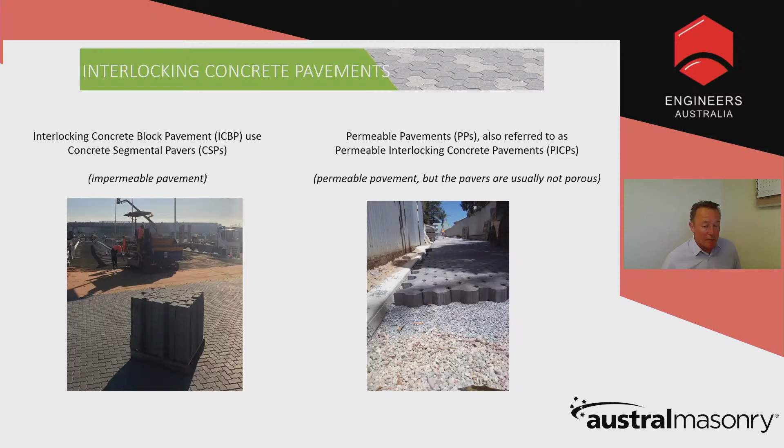CMAA, with great foresight, saw this as an impediment to the adoption of this innovative technology, and so they commissioned UniSA to develop what is the world's latest and most sophisticated software program, DesignPave. The Concrete and Masonry Association of Australia, or CMAA, is the peak industry body representing Australia's concrete masonry manufacturers.

The CMAA funded UniSA to develop the new DesignPave software, which was authored by my colleague, Associate Professor Mizanur Rahman. Later in this webinar, Mizanur will demonstrate the software, which can be downloaded free of charge from cmaa.com.au.

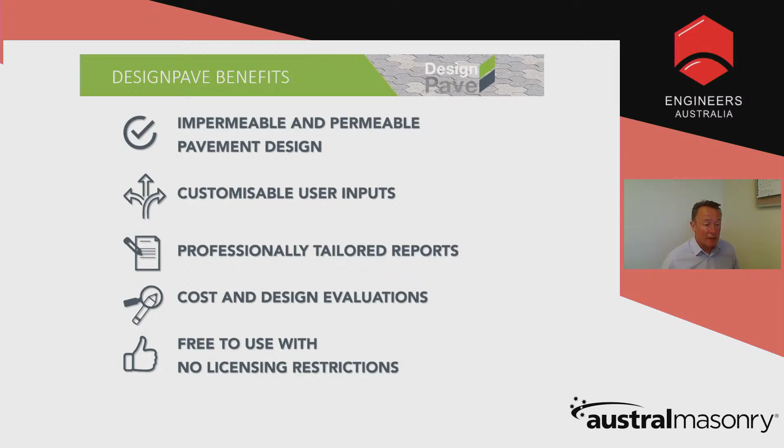The DesignPave program designs both impermeable and permeable pavements and has customizable user inputs. It produces engineering reports for consenting authorities. It can conduct a cost and design evaluation, and as I mentioned, it's free to use.

In terms of engagements, either with the program or with the supporting workshops, in the council arena, we've engaged with 17 councils and over 150 separate participants. And in terms of engineering consultancies, 31 consulting firms and over 300 participants.

I'd like to now focus on 3 recent projects, 2 in Sydney and 1 in Adelaide, that were using the new software tool DesignPave. The first is the very recent 3,000 square metre upgrade of interlocking pavers. You remember these are the impermeable ones, along one of Adelaide's busiest and trendiest streets, King William Road.

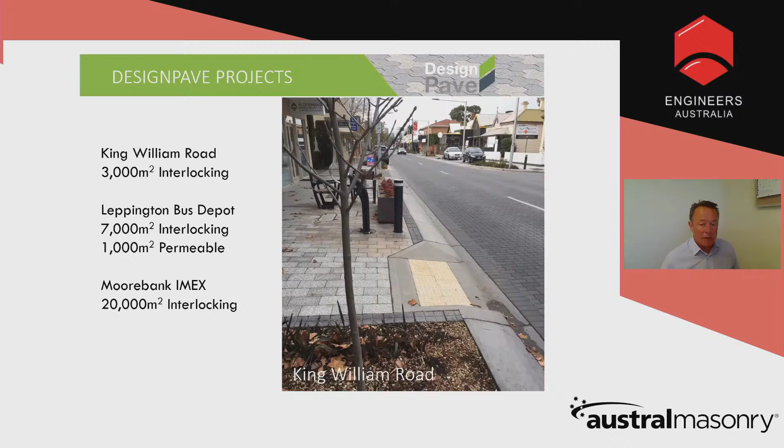King William Road was first constructed with ICBP in 1985. The paved road was 2.2 kilometres long and was and still is the longest and oldest length of urban arterial road in Australia to utilise concrete segmental paving.

Last year, it was reconstructed as shown in the colour photograph. Note that the original interlocking concrete block pavement lasted for 35 years, even though its original design life was probably 25 years. This is the reconstructed pavement today.

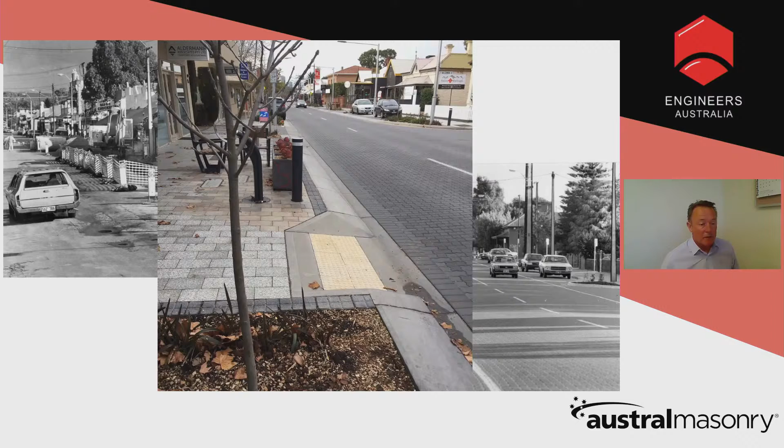The second project is the Leppington Bus Depot. Leppington is one of the first suburbs to be part of the southwest growth area of Sydney, and this project represents part of the public transportation services upgrade.

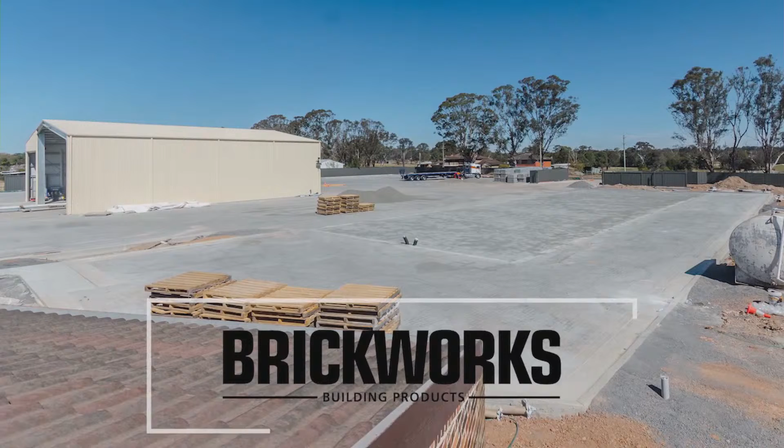The project consisted of 2,000 metres squared of building facilities, 7,000 metres squared of impermeable concrete segmental paving, and two 500 metre square permeable concrete segmental paving pits. All the runoff from the 10,000 metre square site was diverted into the two permeable pavement pits.

Permeable pavements were used to allow designers to maximise the total hardstand area for the bus company. By using permeable pavements, designers were able to reduce site discharge below the council threshold of 88 litres per second for a 5-year design storm and 165 litres per second for a 100-year design storm.

Additionally, the permeable pavement base acted as an underground detention basin, achieving the on-site storage capacity requirement of 200 kilolitres, as specified by the council. This was achieved without constructing large above-ground water storage infrastructure.

From an environmental viewpoint, the project also used a variety of recycled materials. For instance, the base of the interlocking hardstand used blast furnace slag, a waste byproduct from the manufacturing of steel. Recycled sand was used as the bedding sand layer for the interlocking pavers, and the pavers themselves were manufactured with a cementitious replacement in the form of fly ash, a byproduct from the combustion of coal at power stations.

This project also demonstrates the advances that have occurred in mechanical laying of pavers. New pavements are typically laid at 600 to 1,000 square metres per day. Relaying rates are typically 200 to 250 square metres per day.

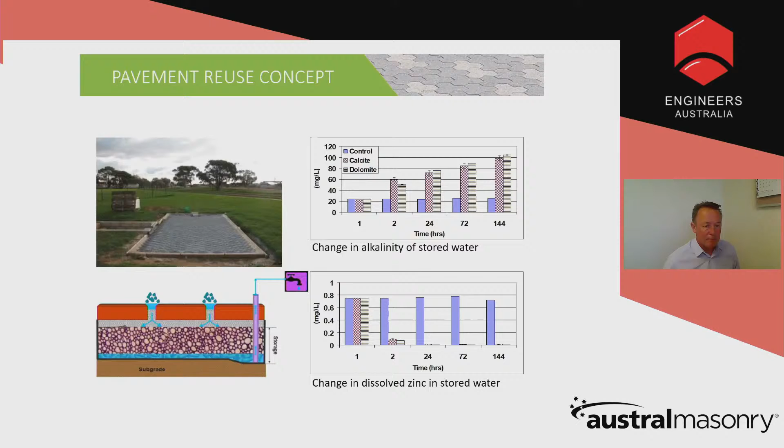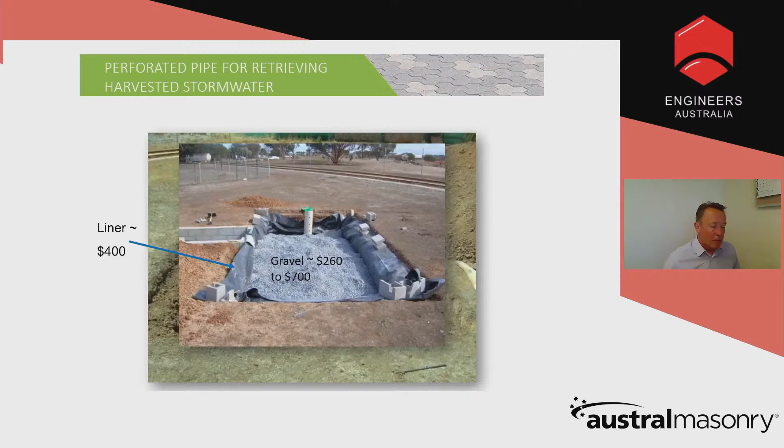The high density polyethylene liner comes welded to the shape of the hole, and that costs $400 to deliver to site. The pavers cost $500 and the bedding gravel cost a further $200, and the total material cost for that car space and 4 kilolitre rainwater tank was $2,200 per car space.

Very affordable. This has shown the simple costs of a small residential system, but what about the cost benefits of other larger systems? The most comprehensive study of whole-of-life costs was undertaken in 2006 in the UK and involved 250 separate projects that were all redesigned and reanalyzed for both asphalt and paving systems.

The results show a whole-of-life analysis that pretty much summarizes that permeable or interlocking concrete block pavements are, in terms of whole-of-life, better than asphalt pavements, other than in initial costs.

It's usually the initial costs which dictate which way a design will go, which is unfortunate because when you look at normal discount rates between 5 and 10%, asphalt in 250 projects was less beneficial environmentally and economically than concrete block pavements. You had to raise the discount rate to over 15% before asphalt becomes more competitive. So that's a whole-of-life cost analysis.

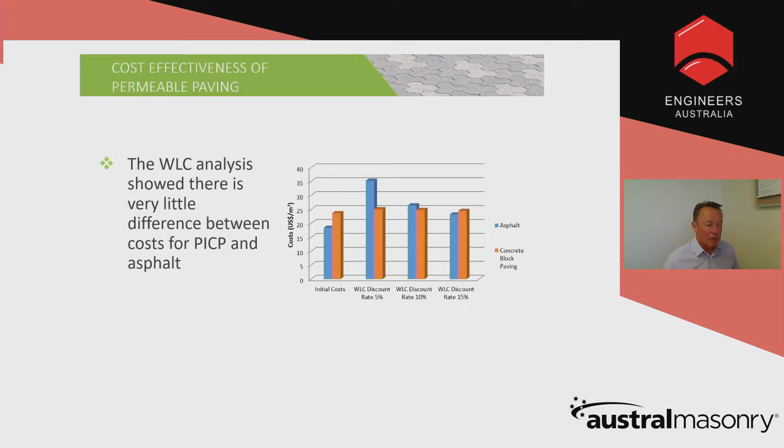What about the environmental performance? Well, one of the benefits of both permeable and interlocking concrete block pavements is their performance in terms of heat island mitigation or amelioration. Asphalt has a very low albedo, predominantly because of its black color, and so it absorbs more heat and radiates this back both during the daytime and the nighttime.

In a Japanese study during the Japanese summer, a paving system reached a maximum temperature of 40 degrees C during the day, while a comparable asphalt system situated adjacently reached a further 18 degrees higher, 58 degrees centigrade. That gives you an indication of what happens with these systems.

When you compare the performance of PICP, which is permeable interlocking concrete pavement, with asphalt and with porous asphalt, there was a stark contrast. During the day, which is the left-hand bar in each case, there was a threefold increase in the daytime sensible heat flux for asphalt and porous asphalt. And this was mirrored at night.

While both were lower, the asphalt and the porous asphalt still radiated 3 times the heat that a concrete block pavement radiated out. So this is further evidence that the environmental performance of permeable and interlocking concrete block pavements is better than conventional asphalt.

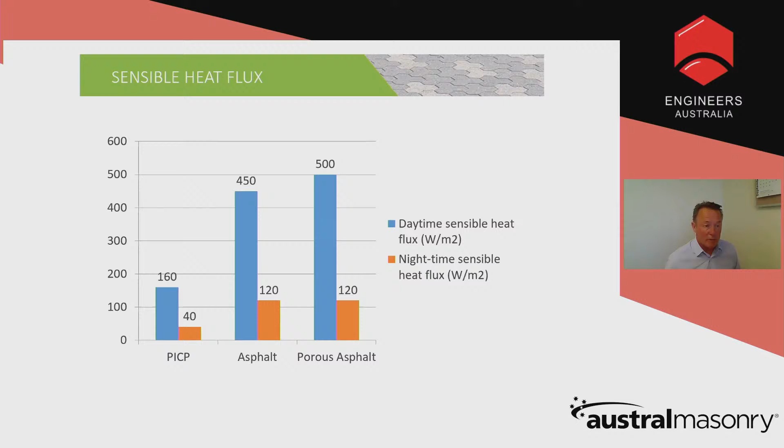A further answer might be to use carbon neutral paving with natural air conditioning through evapotranspiration. A typical tree may capture 20 kilograms of carbon dioxide per annum, or 1 ton over a 50-year lifespan. Therefore, 1 tree per 11 square meters would be required to offset a concrete segmental pavement or a permeable pavement to make it carbon neutral.

Most engineers, though, would cringe at the thought of integrating tree roots with paving systems, but this is largely unjustified for permeable pavement systems, as I'd like to show you.

These photographs are taken from Dr. Tim Johnston's field experiments conducted for his PhD at UniSA. They show juvenile ornamental pear trees planted adjacent to permeable pavement systems located in heavily reactive clay soils in Adelaide. His 4-year study traced and mapped the root architecture that developed in these trees as a result of watering from the permeable pavement.

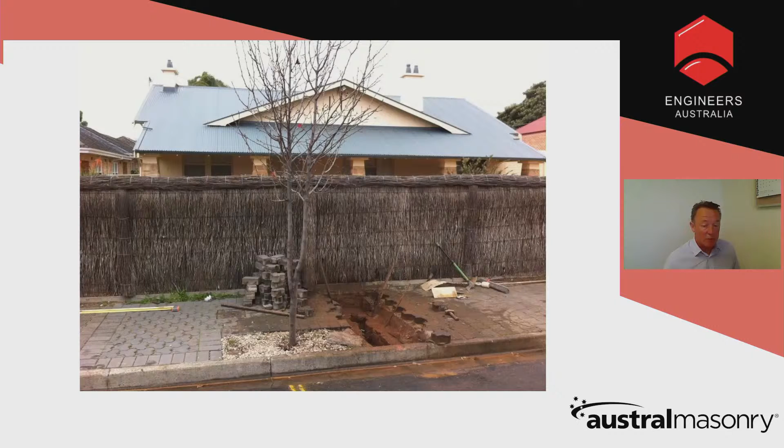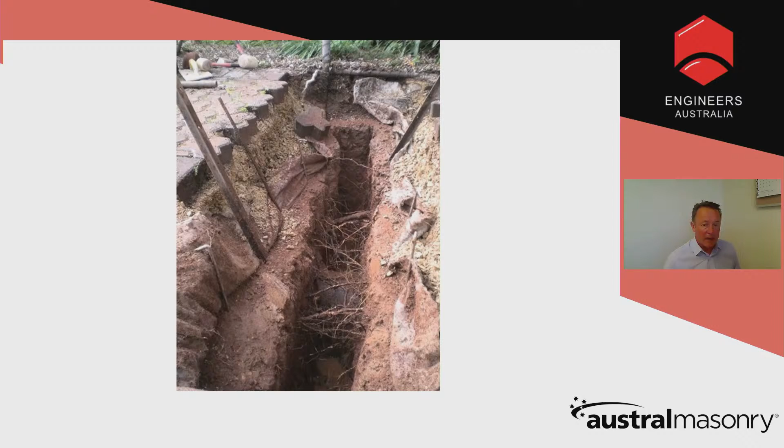Only opportunistic fibrous roots were found in the base course because this layer dries out so quickly, so those fibrous roots never grew into more substantial woody roots. More permanent woody roots were all confined to the underlying clay subgrade, where water was retained for much longer. That's how the architecture of the tree roots developed during that 4-year period. There's a further photograph showing these systems.

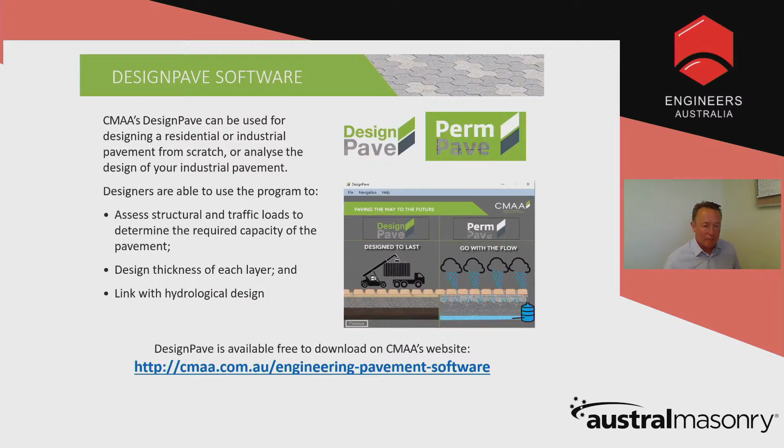I'm now going to hand over to my colleague, Associate Professor Mizanur Rahman, who will demonstrate the DesignPave software, which, as I mentioned earlier, can be downloaded free of charge from cmaa.com.au. Thank you.

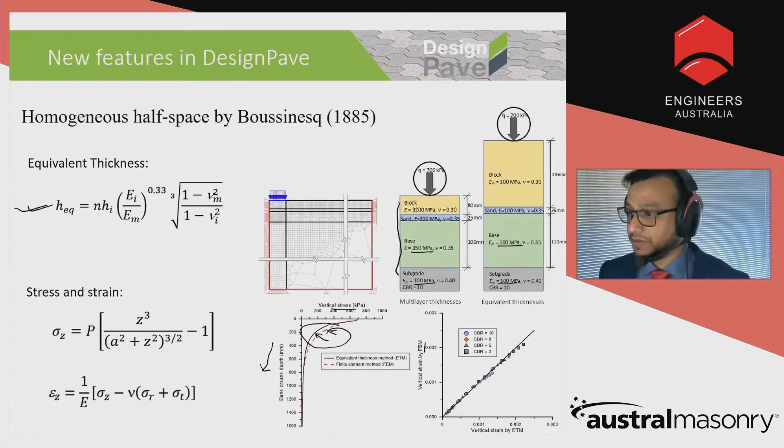Now, interlocking paver is slightly different than conventional pavement, so we need additional consideration for interlocking paver design. Shackel, using falling weight deflectometer data, identified this paver system develops full stiffness between 5,000 to 10,000 load repetitions. This also depends on loading spectrum.

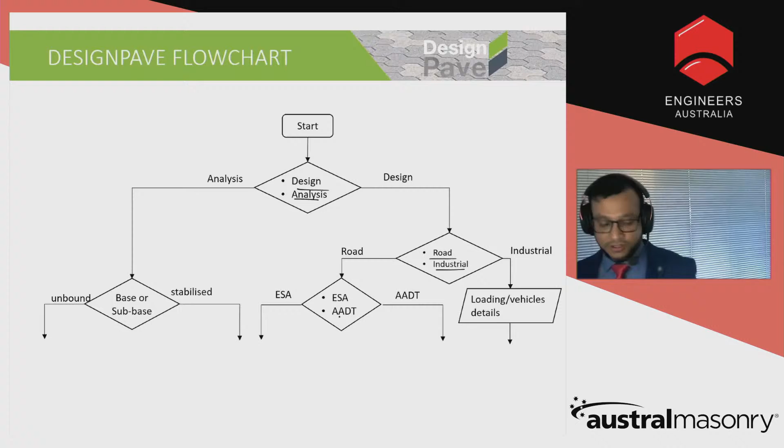Now I will show the flowchart of the DesignPave. When you start the DesignPave for interlocking design, you come up with two options: design or analysis. Analysis could be used for forensic investigation of a pavement failure. For design, when you get into the design option, you have two options: road design or industrial design. For road design, we could use equivalent single axle load or annual average daily traffic. Industrial load also depends on the vehicle type as well.

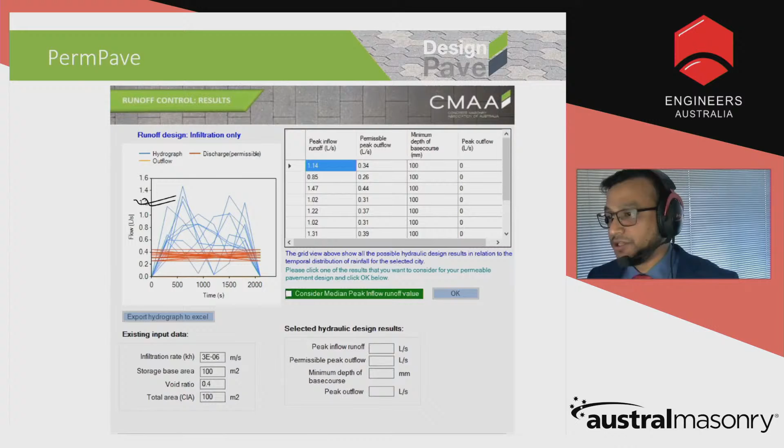ARR 2016 actually considers possibly 10 different rainfall areas. So when the software uses these options, it comes up with all possible combinations. I'll explain this a little bit later again. This is the reporting option. Detailed reports can be produced by DesignPave.

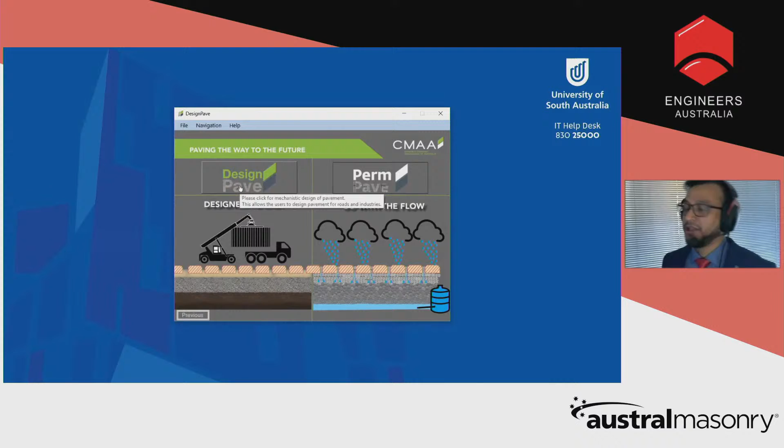So first I'll show this part. Let's get into DesignPave. As I said, you have options for design or analysis. I'll show you the design today. When you get into design, you can go to design for roads or industrial pavement. So let's get into the road.

We can design for equivalent standard axle load or annual average daily traffic. So let's get into annual average daily traffic. When you get that, you would be estimating what would be AADT. With this input parameter, you can calculate that. Let's go on. It's predefined, but you can change all these details.

Now, when you come up over here, you need to estimate what would be the soaked subgrade CBR. It could be 4, or if you have a linear structure, you could have a series of CBR values. So you could put those in and calculate the best possible case. The design goes with traffic spectrum. Let's check this traffic spectrum. So calculate over here and go ahead.

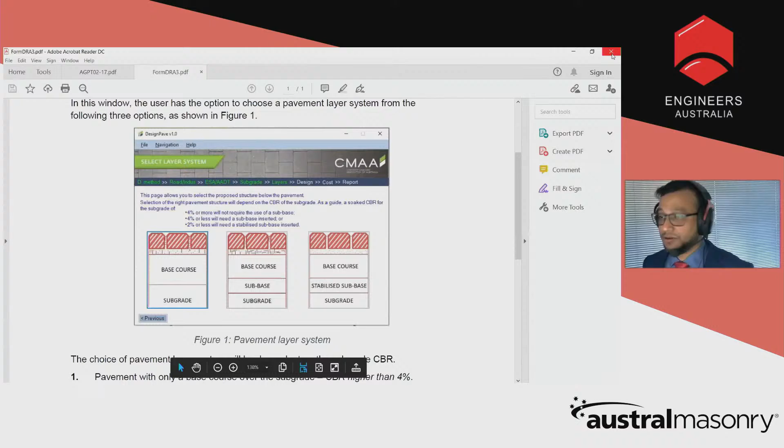We have 3 different options for design, so you could choose any of these. Now, while I'm going through these, note that we have detailed documentation to guide you with the software. For example, if I go to this page, what is it doing? It actually generates the PDF. It tells you what you have to do over here, and it also explains the theories in relevant sections.

So let's go with this one. This is based on traffic spectrum. This is the traffic data.

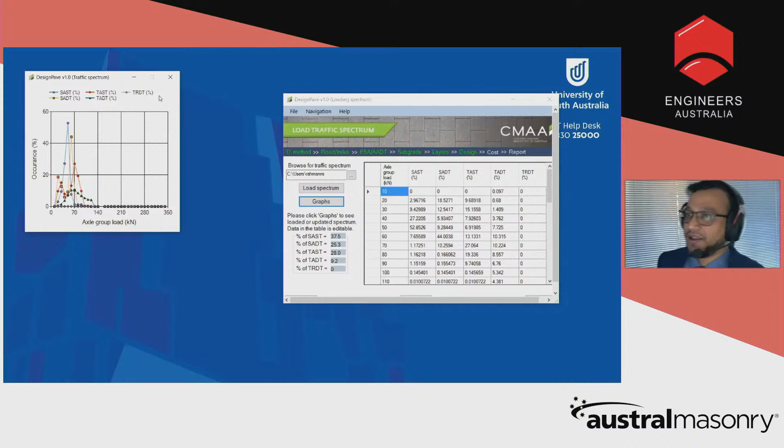I can change to any spectrum if I want to. For example, if I go over here and choose this one, load the spectrum, it's the same spectrum. Show the graph, and the graph generates in another window. So this is the spectrum load I have, and based on that, we'll be designing the pavement.

Now go next. If we design the pavement, click this button. Over here, you notice these are the pavement thicknesses that could vary from 60 to 120, depending on the ranges and material properties you choose. Whatever guide you get here is coming from CMAA. So design - this is the design thickness you got.

Now you notice this is not a smooth line, it's a step line for every 5 millimeter increment of thickness. It's a pretty lengthy calculation going on behind the software.

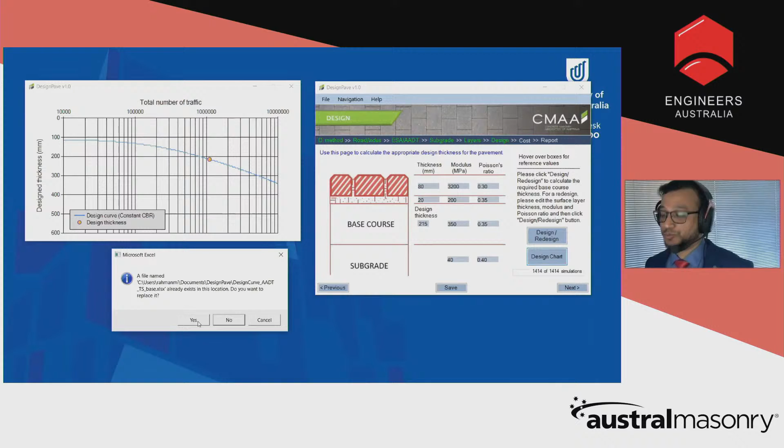So it generates all the data and tries to process it in an Excel file. It actually develops the data and saves it as an Excel file. I already have some data, so it's asking whether I want to replace the previous data. So we can add that.

When you go on with that, we can also do a calculation for cost. Let's go ahead, and then you have to save the file. Let's say save it as test1, and run.

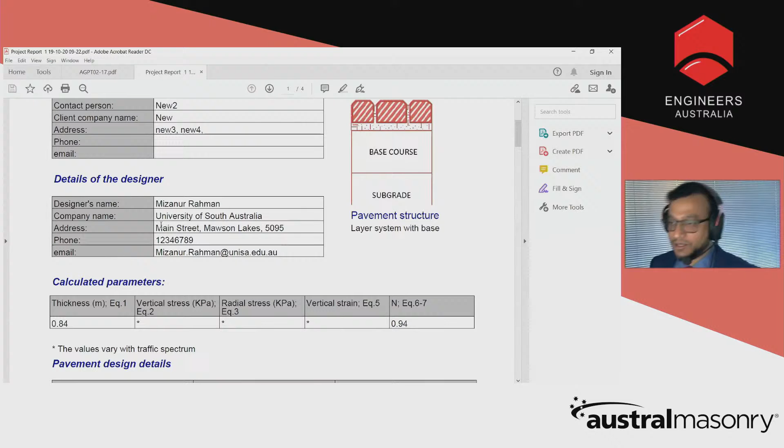This helps you to generate the report. If you click on it, it generates the PDF report. So you can see whatever details I put at the beginning - new, new 1, new 2, new 3 - all comes over here. My license details, all the calculation, all the data, and all the theories required for this design calculation.

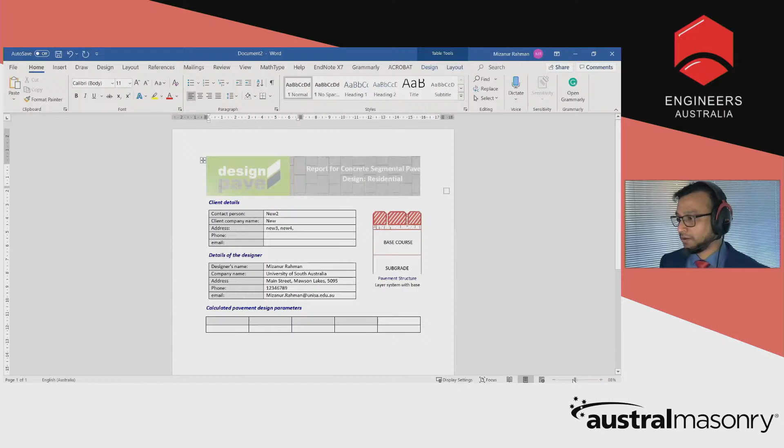Sometimes this is pretty standard, but people need to customize their report, so we also have an option for a Word report. Then you can modify the report as you need. So we'll keep it over here.

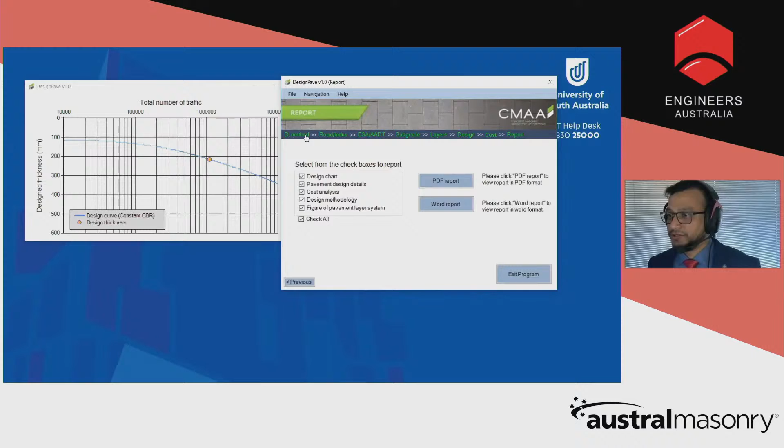So this is pretty much for the design of road. But if we want to design for industrial pavement, let me show you how to do that. Again, go to DesignPave, go over here. So we go design industrial.

Then we have options for several different types of industrial wheel load. We could actually tick all of these if we want to. If something is not here, then we could have a customized vehicle type. So go next.

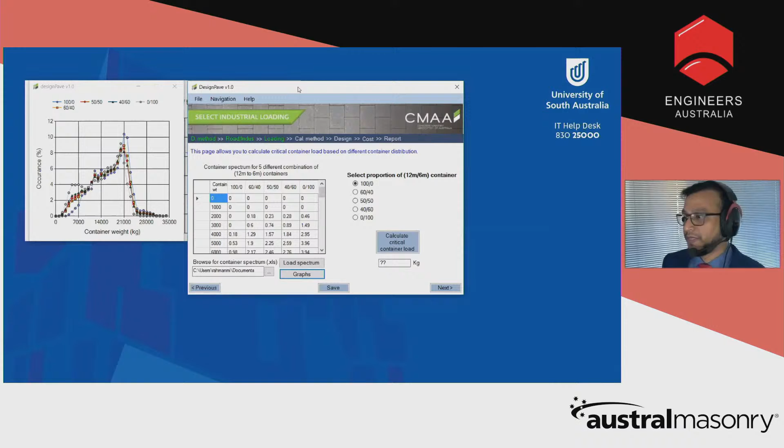Now sometimes for industrial loading, we could have container load. This is a spectrum for container load. We can change that - let me see what the container load is over here at the moment. So this is the spectrum we have. So calculate the critical load and go ahead.

Now, once you do that, whatever vehicle type we chose earlier comes over here. These are pretty standard, predefined configurations of the wheels. It could be changed, so you could modify that.

If you want to know what those are, you can go to the software and it will help you. For example, I often forget what this is - so D is this one, X is this one, for this type of wheel load.

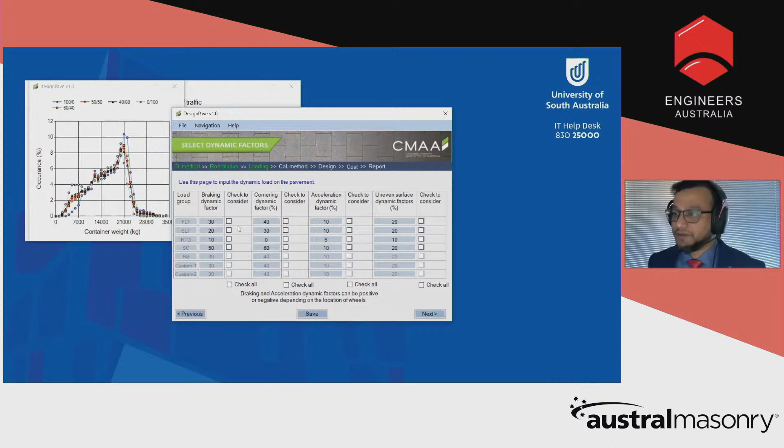Go next. For industrial loading, the dynamic factor is very significant, so you could have different kinds of dynamic factors. You can choose all of these, and you can modify all of these.

Go ahead. So once we do that, it calculates what would be the individual wheel load, and gives all these details over here.

Now, once you come over here, you could design the industrial pavement based on Miners rule, single equivalent wheel load, or British Port method, whatever you choose. So for example, I'll show you Miners rule.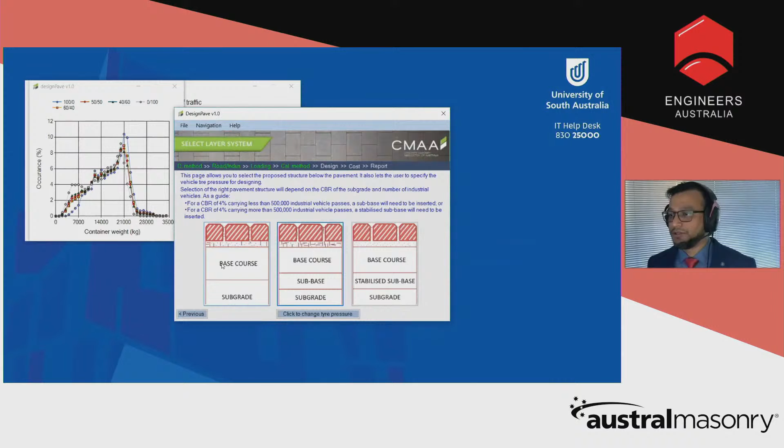So when you go to Miners rule, you could design this. Again, the design thickness comes like that. You can produce a design chart if you want to.

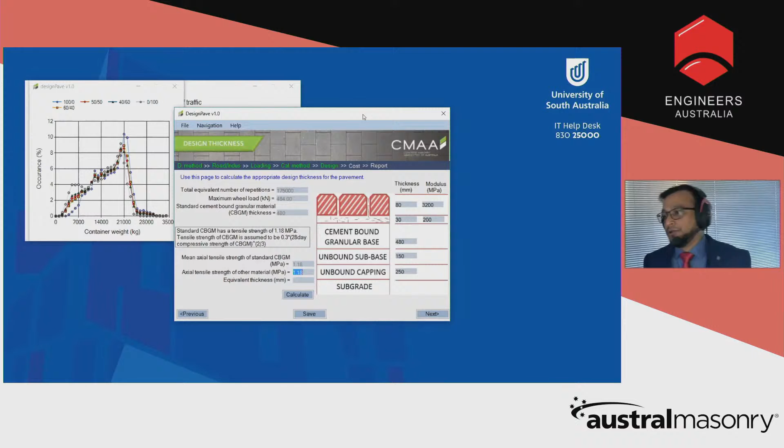Let's go back, and I want to show you a little bit about the British Port method. So British Port method is like that - so calculate. It actually uses a chart to calculate the design thickness with pretty specific standard material. So you can go ahead with that, calculate the cost, and you can also generate the report.

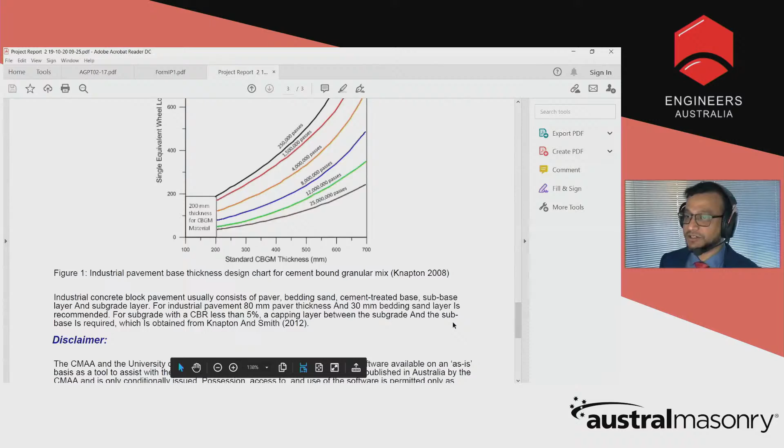So this is the chart used for single equivalent wheel loads that's also used in the British Port method.

Now I'll show you a little bit about permeable pavement design. When you do permeable pavement design, we design for 3 different options: runoff control, water quality, water harvesting. Runoff control and water harvesting are pretty similar, so I'll show you these two first and then water quality.

So let's go on with runoff control. When you get into runoff control, these are the options you could actually design permeable pavement road. Let's go with any option over here, residential pavement. If you do that, then it comes with paver options, so you can look at different types of pavers.

Let's choose this one. Once we choose that, it's predefined - it chooses the predefined values for this paver. You can modify this, but these are recommended from CMAA.

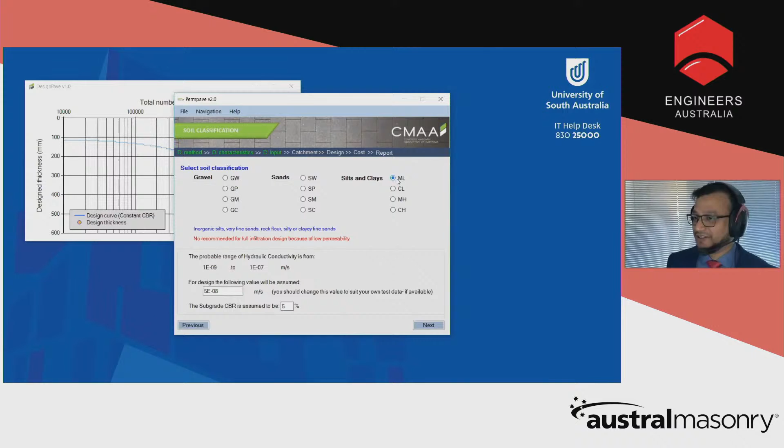Now you could choose subgrade material. For example, if I choose silty or clay, this is not ideal for runoff control - we have different measures for that. Let's go for a sandy type material, poorly graded sand. Once I choose that, these properties are pre-generated. Let's say full infiltration design.

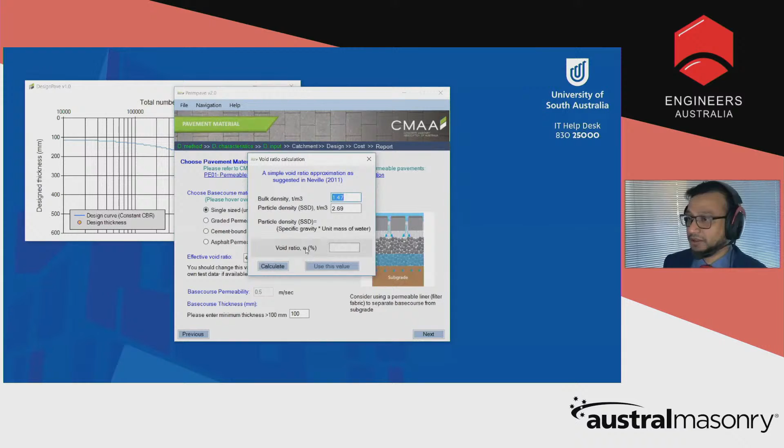So get in, and then these are the base course materials you have to choose. When you go to different base course material, it shows what configuration is suggested by CMAA. Let's go with this one, and see it immediately pre-populates this information. But if you want to calculate this, for example, if I go to calculate with the bulk density and particle density, we can calculate the void ratio and use this value. So it's using that value.

You can design for without catchment and with catchment. Sure, without catchment.

Now once we are here, we have two different options: ARR 2016, which is recommended and new, and the very commonly used ARR 87. We are not using this one anymore, but we also keep this in the software if someone is familiar with it and wants to compare. So go ARR 2016.

Once you go there, this window pops up. It's very important - for example, let's say we have an option for capital cities. If you choose a capital city, then the next thing you have to do is, let's say I will design for Adelaide - go Adelaide, and AEP let's say 5%, 30-minute rainfall. It has pre-burst data, so you could include that, or choose not to. Then we want a target runoff coefficient of 0.3, go ahead.

And this is the data we have. So now you see in 2016, instead of 1 rainfall data, we have 10. And if you go into one of these, we can see this first part is the pre-burst option.

Now over here, it asks you, once you have completed hydrological design, whether you want to do mechanistic design as well. So let's say yes, new, and you could again design for road and continue the same process. Let me show you because it will generate some information. Let's go traffic spectrum again.

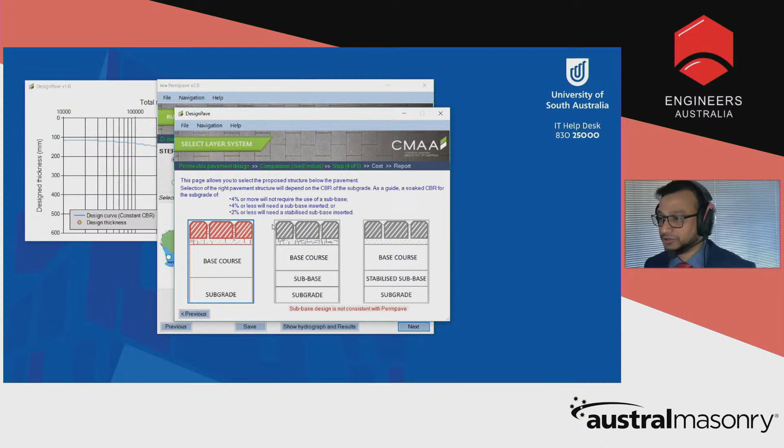I'll quickly pass that because when you're designing permeable pavement, you do not use cemented or stabilized material, so these options are inactive - you cannot use this base course. Go next, design - you could generate a design chart, but we are not interested anymore.

Go next. Now over here, it tells you the base course thickness for mechanistic design is 180 millimeters, whereas permeable pavement hydrological design says 100 millimeters. Now you could choose one of these.

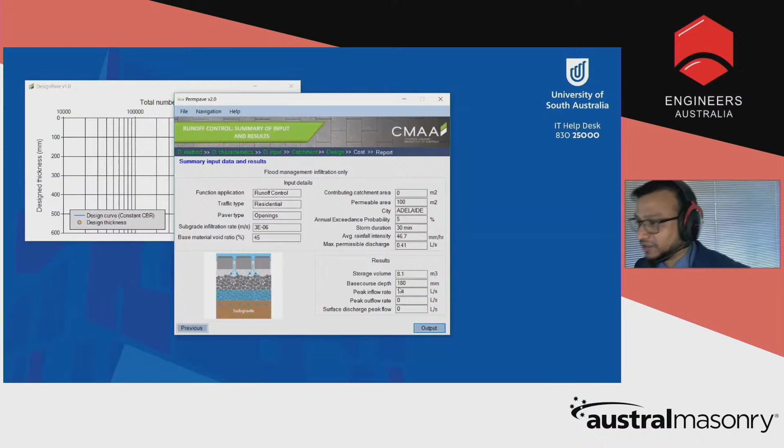So we said okay, we'll go for mechanistic design, so that thickness comes over here. It tells you all the configuration of the material over here. For example, if you want to know the configuration, the link is given over here. This is the website - it gives you all the details.

Now I want to show you another very unique option in Permpave. Instead of the capital cities, you can actually choose any location in Australia. So for example, if you know a location where you could get IFD information, you could use the BOM website to download their data.

You can also use the BOM website to download their pre-burst data. And once you get this data, you can put it into the software and it can do the calculation and design. For example, if I go over here, this data is for Mawson Lakes, where my campus is. So over here you see all this information - you just need to download this data.

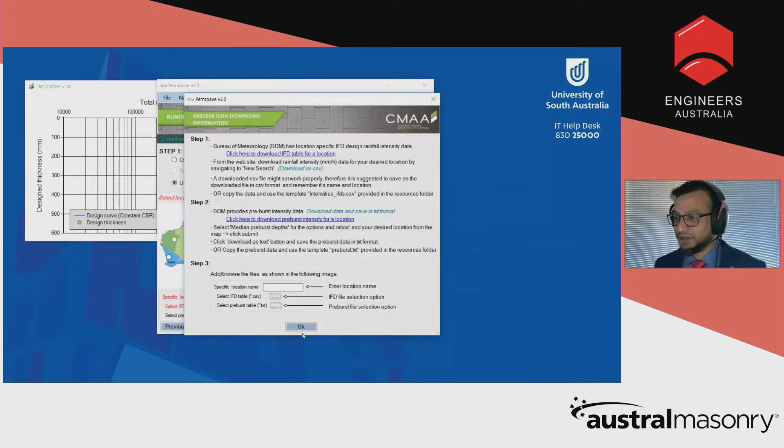Let me show you the download options. Over here you can download it as CSV. This morning I downloaded some data, so I can show you how it works. For example, I choose a specific city, Mawson Lakes in Adelaide. So I just put ML, and the IFD data I put somewhere on my desktop.

So Design Pave data - this is the data selected over here. Now if we want to use pre-burst data, you can download it again and pre-select it. It's done. We want to see pre-burst events, so keep it.

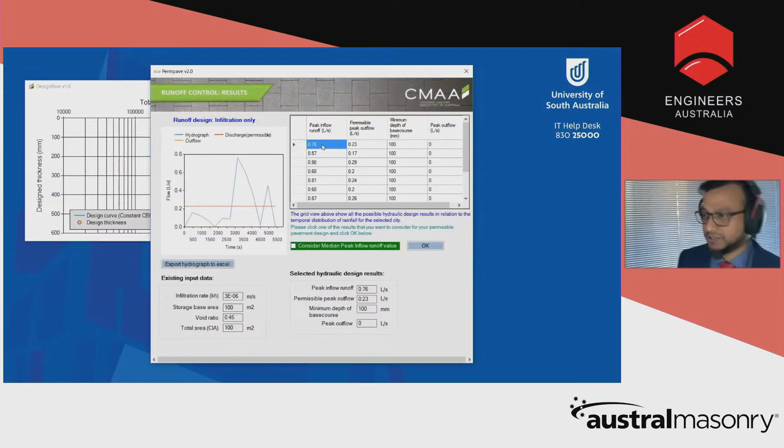This is the data we got from Mawson Lakes. It's maybe the same data as I showed you before, because that's the default data we made for the software. You can use this for this design, and you can go ahead with mechanistic design or not, you choose.

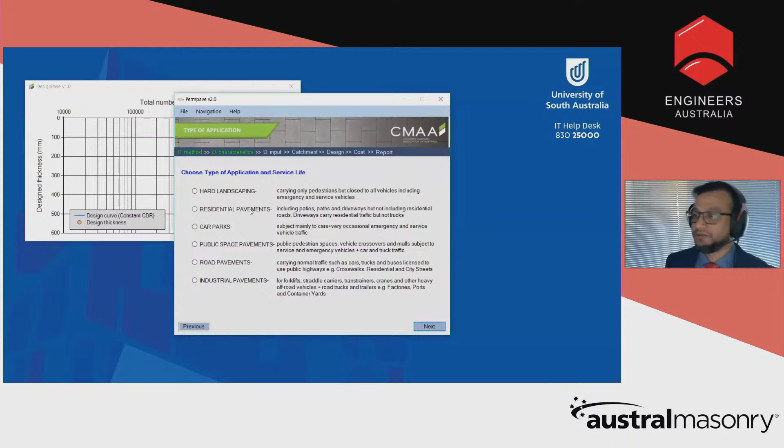The other option for this design would be water harvesting. So go to water harvesting. It's slightly different, so let's go to residential pavements. If you go there again, you can choose all these details. Over here you need average annual rainfall data, and you can modify all these. Let's say we want to harvest 100 liters per day.

Let's test, save this one, and choose Adelaide, calculate. So it gives you several options of design. If we want to get 100% solution, then the required base course thickness would be 275 millimeter. But what would be the optimum design?

It would be 88.3% of the total solution. In this case, the base course thickness would be 100 millimeter, so you can harvest 88 liters of water per day with 100 millimeter base course thickness, versus 275 millimeter if we want the full solution. So this is the most economical design. You could choose one of these. Go again, you could choose whether you want to do structural design or mechanistic design. No, and you can go ahead.

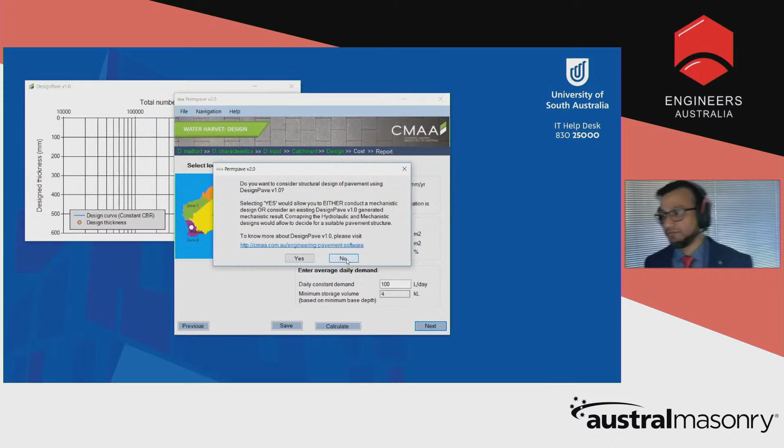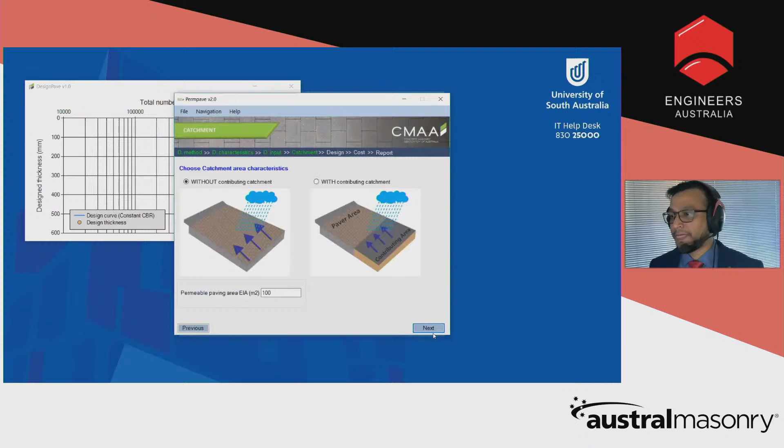Now I'll show you how to design for water quality. So go back to Permpave, and this is water quality. Let's go on, again we'll go residential pavement. Now over here again you can choose average annual rainfall.

And we want to improve water quality for suspended solids, total phosphorus, and total nitrogen. We want to reduce 80% of total suspended solids, 45% of phosphorus, and 40% of nitrogen. And for the reduction coefficient, you have to choose. You can put it in yourself, or calculate it.

Or you want to calculate an equivalent number from MUSIC software, you can do that. So for example, I'll show you, we go to that one. It tells how we combine some information from MUSIC. Let's calculate and use this value, then it will come over here. For example, this one, again calculate, use these values. Again, calculate.

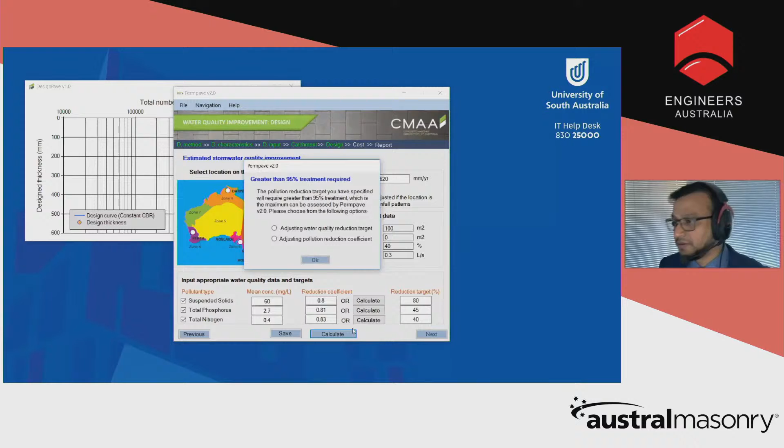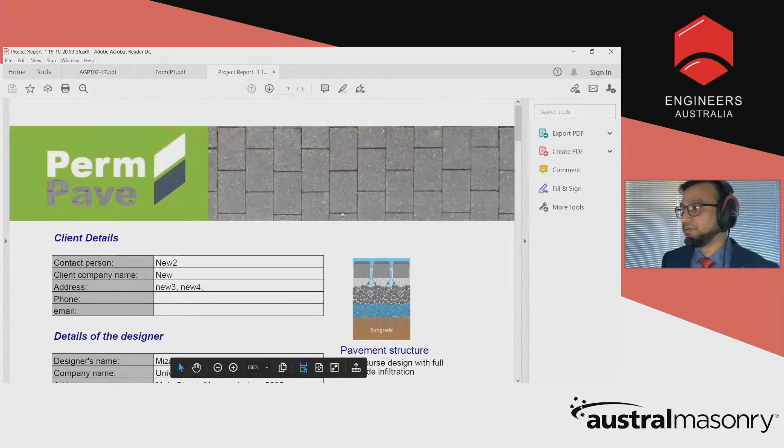And now we want to do all of these. So it says greater than 90%, 95% of the runoff has been treated. So these are the design options we come up with. Go ahead, we want to do mechanistic design now. Go ahead, calculate, and then we can generate the report. When you choose to include mechanistic design, the report will generate information for mechanistic design.

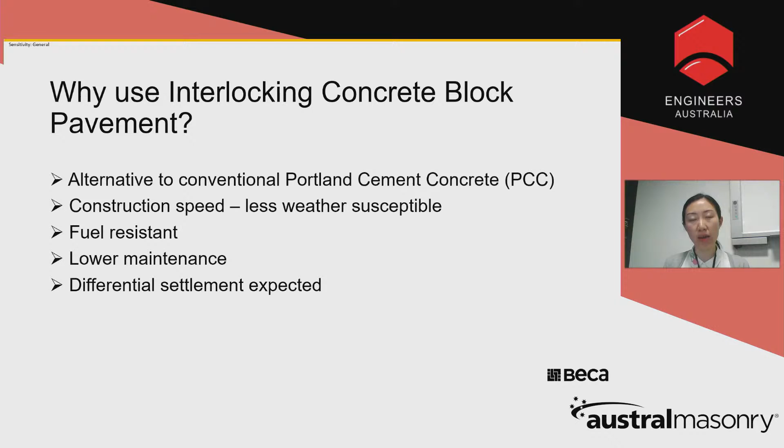ICBP is also a good pavement candidate if your site is subject to differential settlement. This was the case for the original Hong Kong International Airport, as the site was built on reclaimed land. The predicted settlement over time, over 30 years, was up to 500 mil, with a differential settlement expected between 200 to 300 mil. So the blocks could just be relaid once over time to the correct level as required.

These blocks are typically placed on 20 mil bedding sand on a layer of geotextile. We often specify a stabilized base, which could be in the form of a cement treated base course or lean mix concrete. Sometimes you may need another layer of fine crushed rock underneath, either due to undercut or a slightly weaker subgrade.

This type A block is the only type that is suitable to be laid by hand for heavy-duty loadings.

The design standard and guidelines commonly referred to for ICBP is the UK Defence Estates concrete block paving for airfields, as shown to the left. Australian standards also have a set of design manuals, as you see on the screen. Also, the Concrete Masonry Association of Australia has a set of publications that specify the segmental pavements. These documents include the design considerations and construction specifications used for the block pavers.

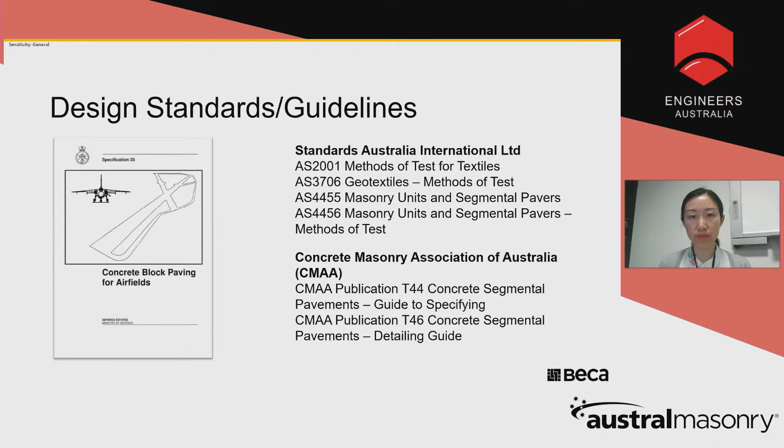Here are some photos showing the completed interlocking block pavements on aprons. The typical type A blocks with weaving edges are laid in a herringbone pattern with service pits in there as well.

Paint marking applies as per normal to other types of pavements. Those photos were taken for the Christchurch International Airport Gate 26 reconstruction.

Top left photo shows the curing sheets and plastic sheeting on top of the lean mix concrete, used as curing with sandbags holding it down. The other three photos show the various stages of the block paving being laid.

These were laid by hand, as you can probably tell from the photos. The bottom right photo shows the straight edge being used to check the surface levels, and the blocks being laid in herringbone pattern, as mentioned previously.

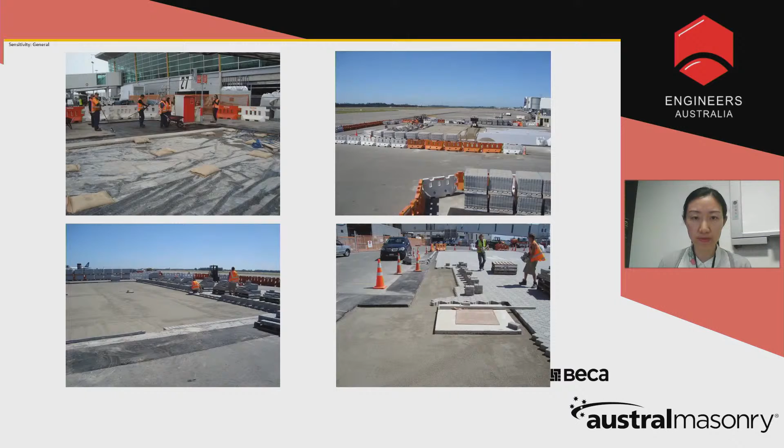These close-up photo shots show the typical details of the block pavers at pavement edges, surface trenches or surface pits. You could use different types of blocks, as you can see from the photo here. The straight edge was used at the edges, which are laid perpendicular to the surfaces, edges, manholes and edges as well.

Here is a fragment of the time-lapsed video for the Christchurch Airport Gate 26 reconstruction, courtesy of Christchurch International Airport and Fulton Hogan. Beca was the design consultant for this project and Fulton Hogan was the head contractor.

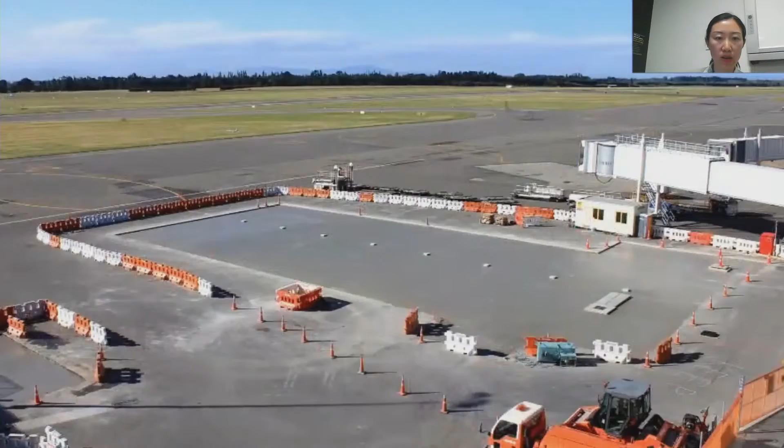Here's the fragment of the time-lapse video. As you can see, this layer of lean mix concrete was poured and the hessian mats were placed on top as a curing layer, with plastic sheeting and sandbags used just to hold it down to keep the curing in place.

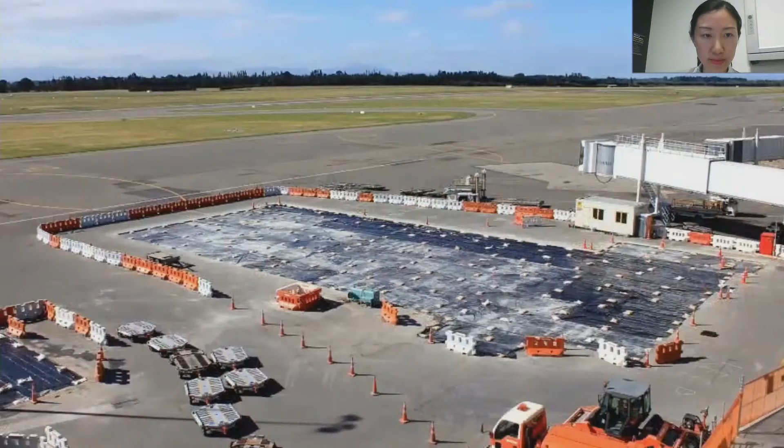The original pavement was in asphalt, and this extent was over the main gear parking area as well as the nose block. While they waited for the curing to occur for the lean mix concrete, they were reconstructing the asphalt tie-in edges, as you can see from the video.

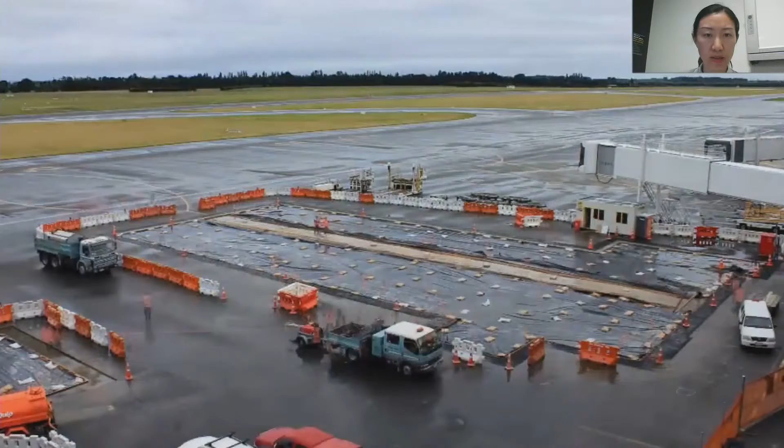Once that's all completed, the curing mats and the hessian mats were lifted up, and the pavement was cleaned and let dry.

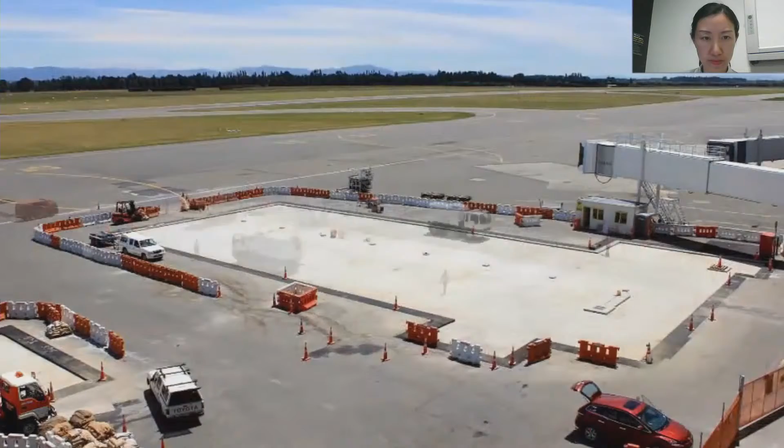Then the layer of geotextile was laid over the entire area above the lean mix concrete. Bedding sand was delivered in bags to site and was just dumped and laid out.

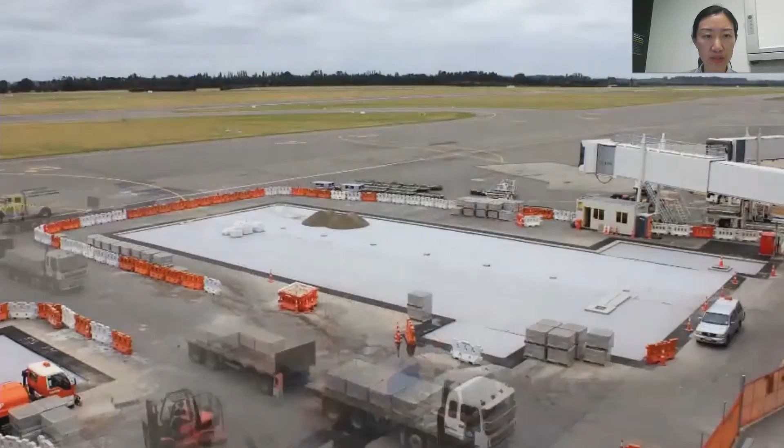The block pavers were delivered to site on pallets, as you can see in the middle of the video. Bedding sand was spread out, generally 20 mm of bedding, and compacted well as a buffering layer. To the far left, you can see the blocks were placed by hand in the transverse direction.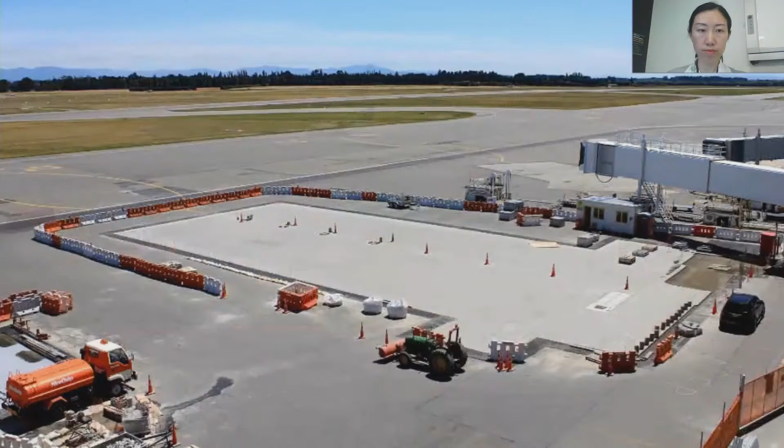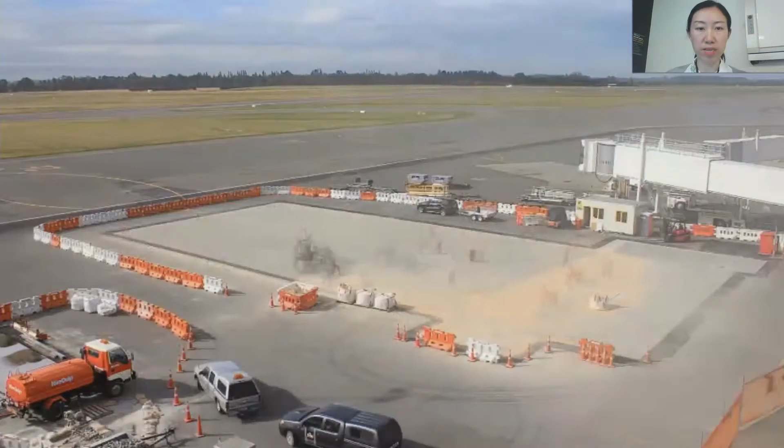Sealing sand was applied, as you can see, just to fill all the joints. The joints are typically about 2 to 3 mil, and this sealing sand was just to fill in the gaps. Then the final sealing layer is applied to hold it down so that the sand is not eroded away or jet blasted away.

So what to look out for with those blocks? They need to be manufactured to quite high quality. You typically need several molds during production so that the block dimensions are maintained. If you don't maintain the block dimensions, deficient joint spacing could result. If the blocks are slightly too large, the joint is slightly too large than specified, then you lose that interlocking ability.

If the joint is too close, i.e. the blocks are butting up against each other, once loaded by the wheels, aircraft wheels up to about 30 ton per wheel, those blocks are going to crack up, rotate, and spall away. So these need to be quite carefully designed. The joint tolerance is typically quite small, between 1.5 to 2 mil as a tolerance, so careful attention to detailing is required.

As you've seen in that video previously, a bedding sand and the jointing sand was used. So those sands need to be of very high quality. Otherwise, you're going to end up having a rocking surface, which no one wants to have on the airfield.

Unlike the application on roads or pedestrian pavements with permeable blocks, we actually do not want the blocks to be permeable on airfield. This is because the subbase and subgrade are very moisture sensitive, and if there's too much water entering the pavement, we could end up having shape loss and a defective pavement.

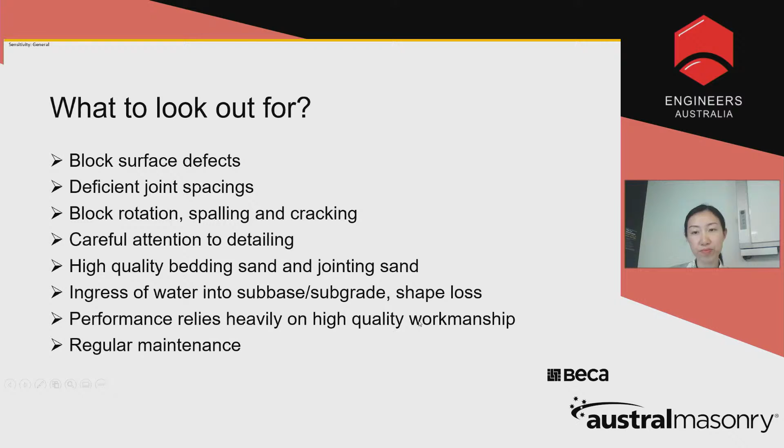To sum up, interlocking concrete block pavement, or ICBP, is suitable for use on aprons as an alternative to other types of pavement. There's no major curing required for the blocks as they've already been manufactured at the factory. It is less weather susceptible, hence overall shorter construction than conventional Portland cement concrete.

The blocks are fuel resistant, therefore it's a good choice on apron. The maintenance is typically lower compared to other types of pavements. It is a good candidate, good application for use on sites where differential settlement is expected.

As mentioned earlier, the blocks can be laid mechanically or by hand, with the latter appearing to be specified more often. As such, the success of the block pavement application on the airfield highly depends on the details specified, the workmanship of the labour, as well as the quality of the materials. Thank you.

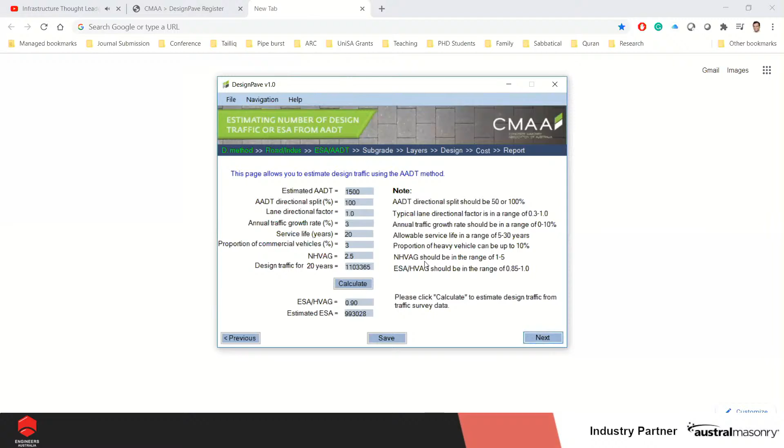So if you go to the design page, and let's say any of these designs, if you want to modify the design parameters according to the requirements of the City Council, you could do that within this software. This software has recommended numbers for default material, but you can change these to an advanced design option. When you do that, you are free to choose any parameter for design. So that is one unique feature within this software.

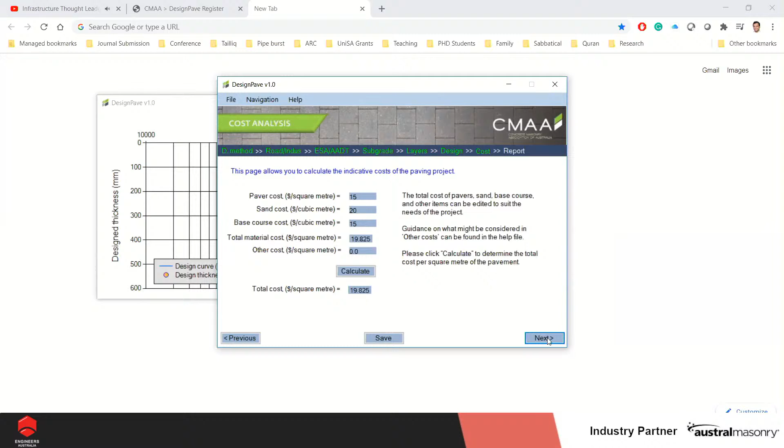And the other option we discussed during my presentation is the reporting. If you generate a report in Word format, this software allows you to modify the report however you want. So if the City Council is interested in a particular design calculation, you can show them that calculation. So this is how you can actually customize the design: one is through the reporting, and the other is manipulating the design parameters.

Thank you for that, that's great. We have got a question from George, and George, thank you, you've sent in a few questions, so it's great that you're so engaged. One that jumped out for Simon in particular is George asking, what are the maintenance requirements for a permeable pavement over a 25-year design life?

Thank you, Amanda, and thank you, George. That's a great question, and it's one that is very commonly asked. Probably the two most common ones we get are about clogging and how to mitigate or ameliorate it, and the other one's about the strength of permeable paving in particular.

In terms of clogging, there are a number of approaches and almost philosophies you can adopt. One, which will sound probably very surprising to most people, is that you can have a zero maintenance regime if the design is undertaken accordingly. What I mean by that is from a number of field studies, both in Australia and overseas, there's been a very careful examination of the decay, or the decrease in infiltration in permeable pavers over time, over years.

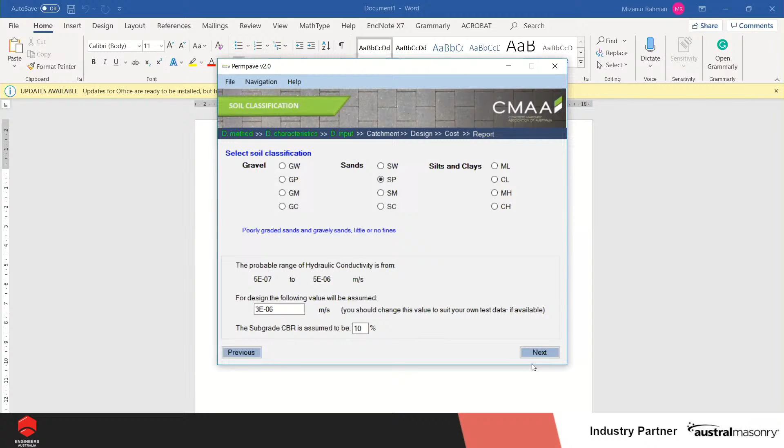For a runoff design, if you use our software, PermPave, it will actually guide you on what kind of subgrade would be suitable. Let me share my screen and show you. If you go to PermPave software, runoff control, let's say residential building — this is the paver layer, giving all the parameters. But over here, if I go to silty and clay type material, it gives a recommendation: not recommended for full infiltration design for a runoff system. So this gives you some experience-based database. But if you try to design for sand or gravel type, it should be fine.

Thank you very much for that. We've had a question asking what is the minimum width of the shoulder of the interlocking pavement for the model to be valid? I'll throw that open to whoever wants to pick that one up.

Well, it depends on the application, I guess. I would imagine that in the airport area that Shusha works in, the edge barriers have to be quite strong. But in a residential road, a standard curb is usually sufficient, which is a much smaller application.

Shusha, do you know about the edge constraints used on the airfields? I'm sorry to put you on the spot there.

No, that's all right. For airfield applications it's probably slightly different. As mentioned in the presentation, the ICBPs are only used on aprons, and aprons are really low speed, typically 5 to 10 kilometers per hour. Usually those are used either together with other types of concrete pavement or with an asphalt surround. And typically, as expected with other asphalt and PCC interfaces, there's always going to be that subsidence or channelized rutting along that asphalt surface. This is no different whether it's ICBP or conventional PCC - you're just inevitably going to have some edge issues over time, and that's where the majority of the maintenance will occur. There's no such constraints in airfield application, really.